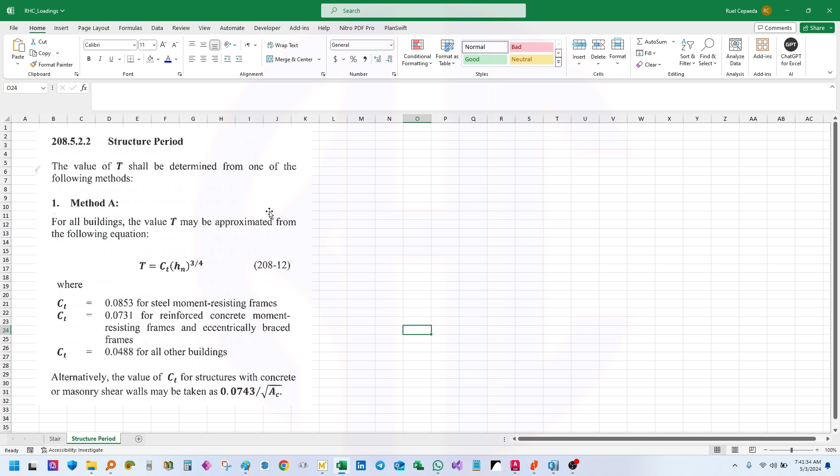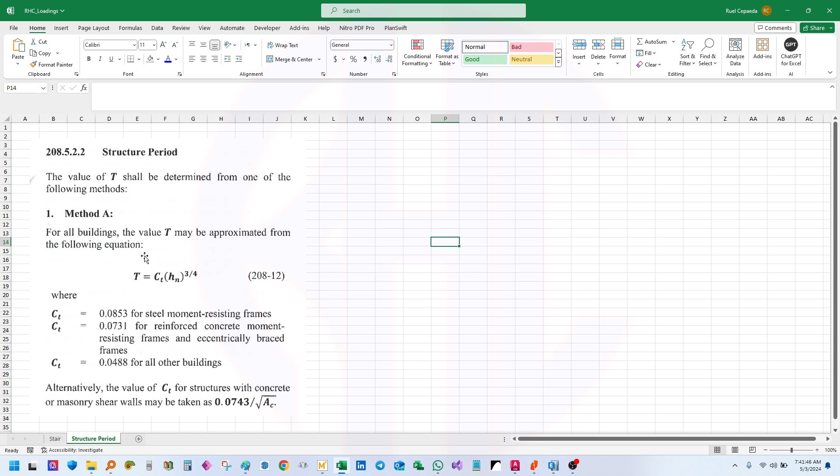Let's go to the NSCP. Our Ct value is in terms of feet, so we need to check the NSCP value. It says here, the structural period as per NSCP, section 208.5.2.2. This is our building period, approximately, using Method A.

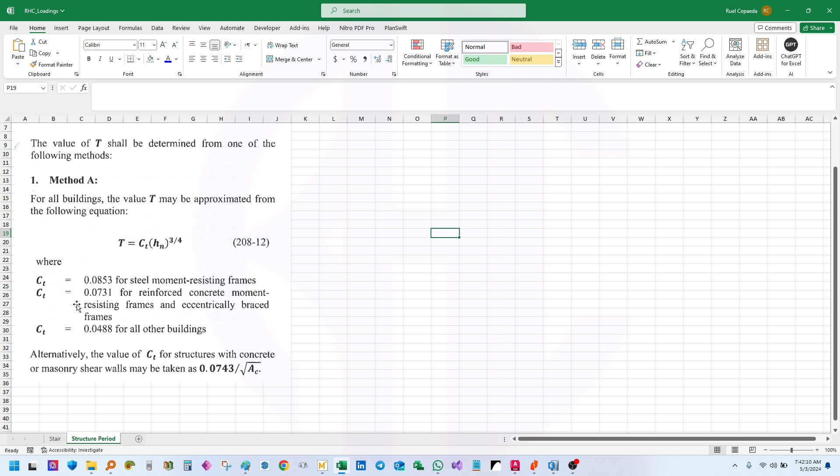But we just need the Ct value, because that's what determines it. However, our NSCP is in metric, so we need to convert it. Since it's reinforced concrete, the Ct value should be 0.0731, but in the NSCP here, it should be in feet.

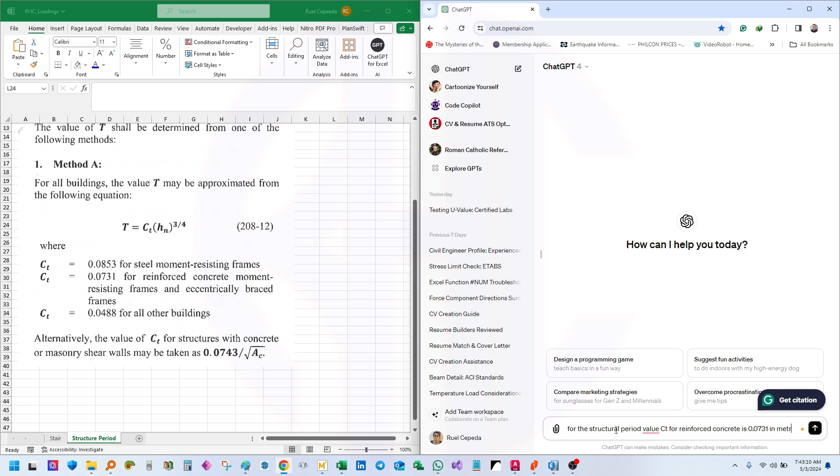So let's ask ChatGPT. For the structural period value Ct for reinforced concrete is 0.0731 in metric. What is the value of Ct in feet?

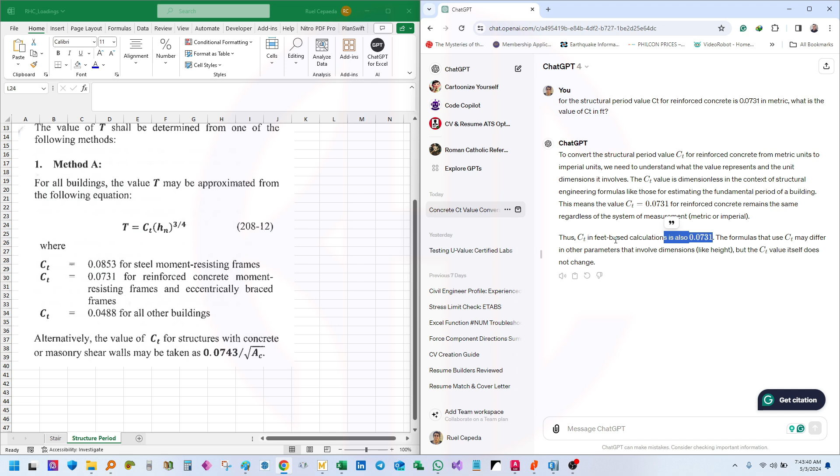Let's copy this. This is in metric. Your answer is not correct.

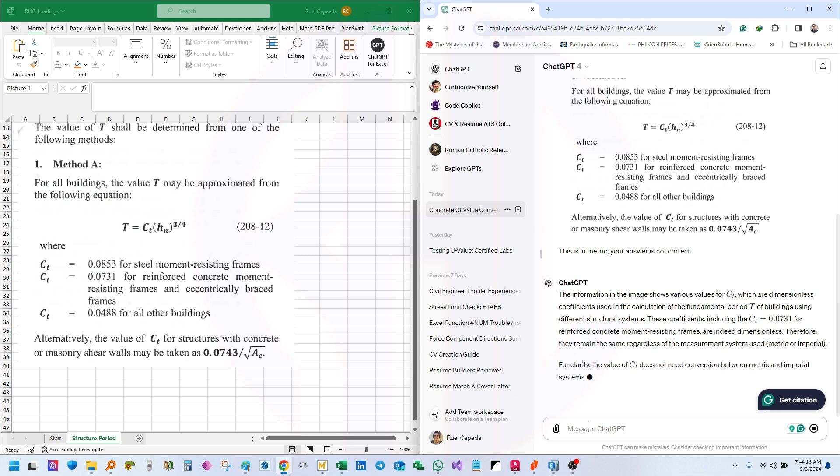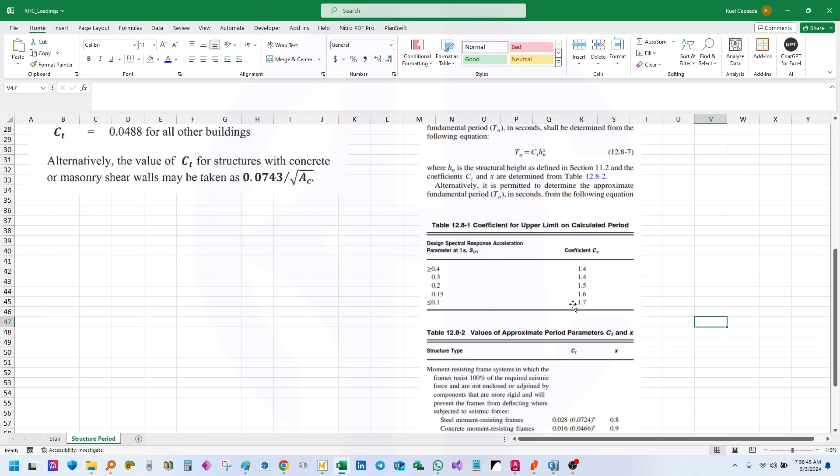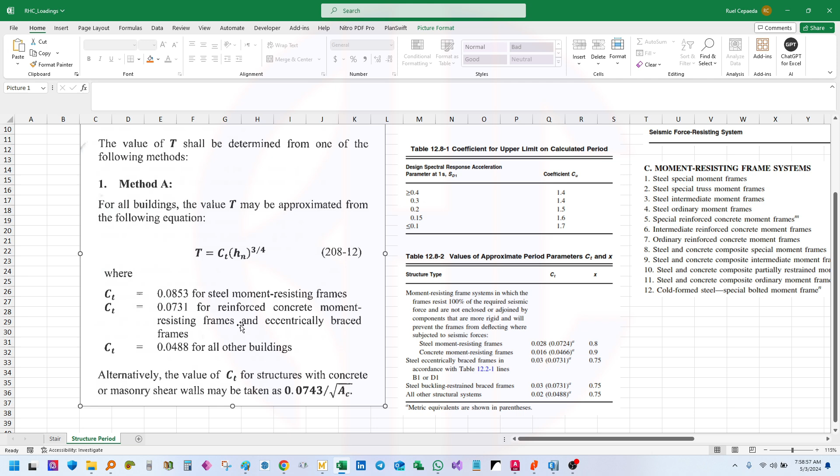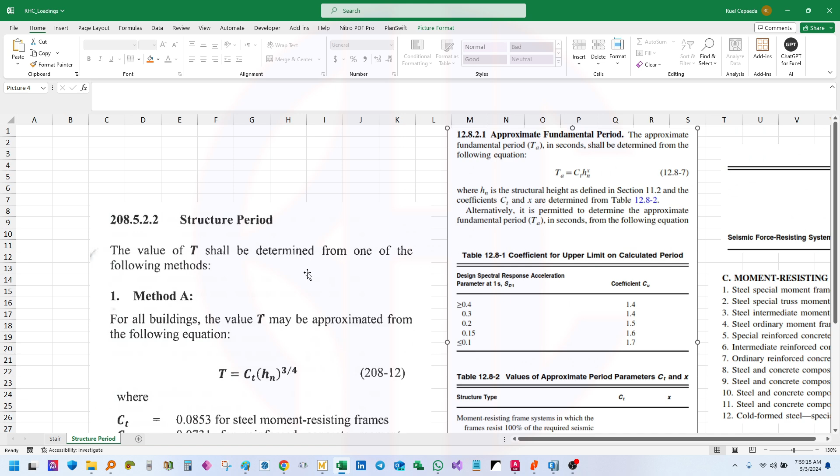Guys, let's check this, there's an update. As per NSCP, our reinforced moment for Ct, reinforced concrete moment resisting frame, is 0.0731. But if we notice here in ASCE, where is that? There it is. The ASCE value for concrete moment resisting frame is 0.016 or 0.0466 for metric, because it says here that A in parenthesis is metric.

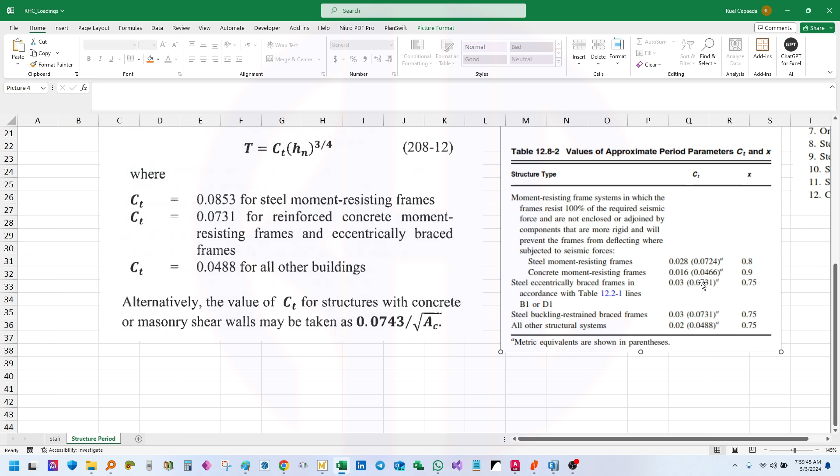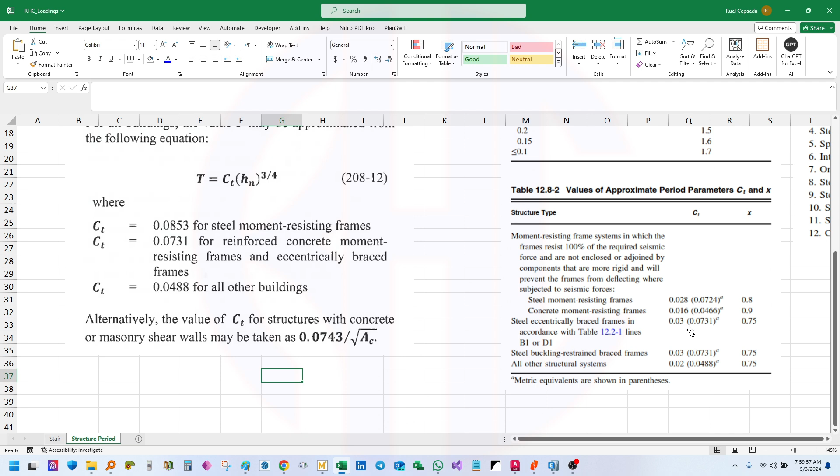But if we notice here, the 0.0731 we have is equivalent for steel, and the equivalent English value is 0.03. See? So of course, NSCP will still govern. So I will use this 0.03. Okay, so from here, that is 0.03.

Okay, then for the bottom story, of course we assume - although for seismic we could analyze from ground to the roof, but to make our design conservative, we will use the bottom story and the foundation.

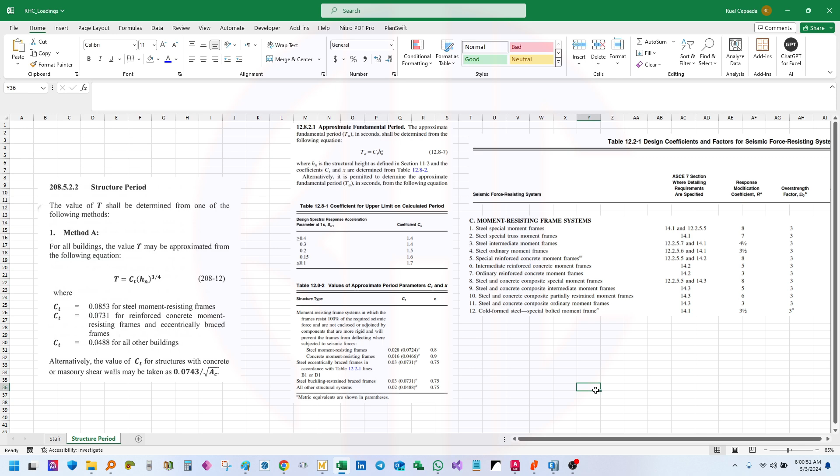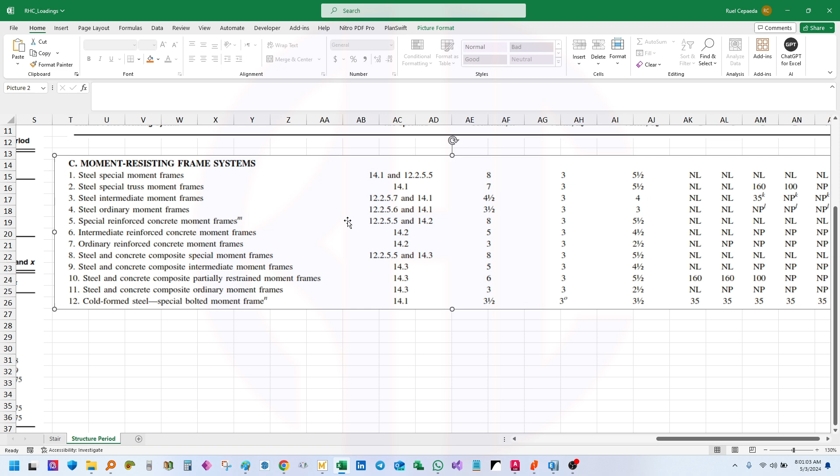Then, our overstrength factor - what is our overstrength factor? 8.5 in NSCP. But if we notice in ASCE 7-10 or 16, for moment resisting frame structures, our R value is only 8. So of course we need to check NSCP since we're following NSCP.

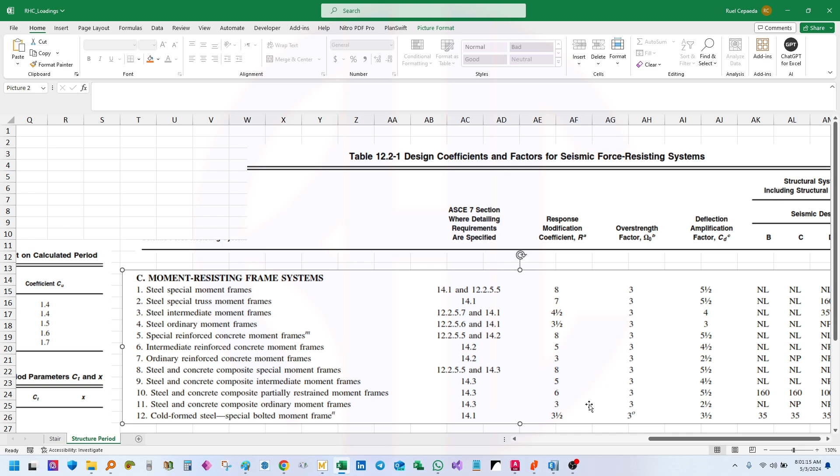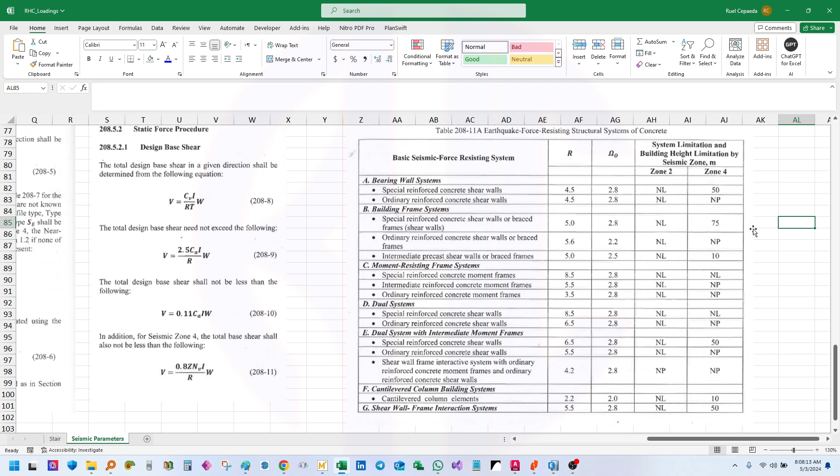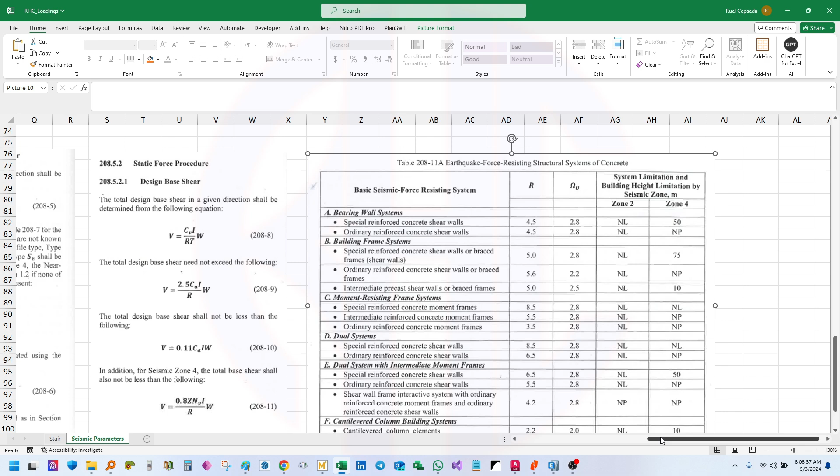But as per table 208-11A, our special reinforced moment frames value is 8.5, then omega is 2.8. Then for zone 2 and zone 4, it's not limited. So if you're in zone 2, without earthquake, that applies to zone 2. It's better since the values are smaller, but mostly we're in zone 4, so we need to use the R value of 8.5. Then the omega is 2.8.

Okay, this is 8.5. Then if you want, you can user-define, say Cv. Okay, let's check our Cv, guys.

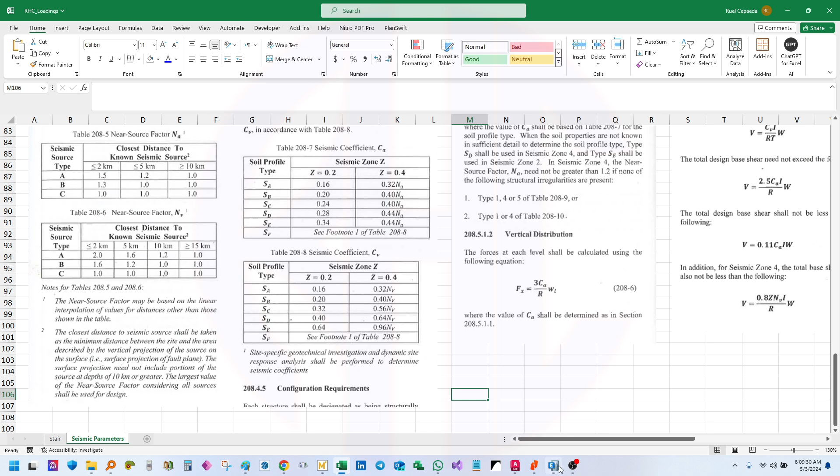So what will we use? Either we user-define, or we can use by distance.

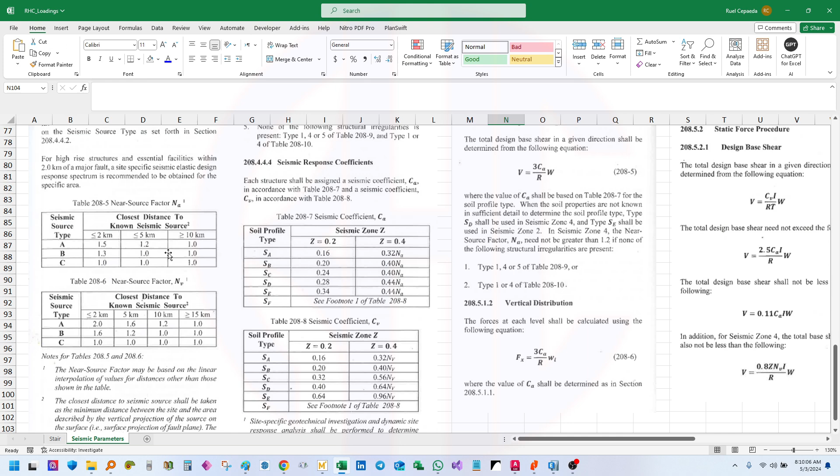There, but if you notice, the updated data is only as of 2018, so it's up to you if you will use it. And it's much better if we have the soil report, so we can optimize our structure.

Let's just click agree. Then from the base map, let's check Google Maps hybrid. Then close. Let's use, we're in Catarman. Catarman location - just drag it, scroll to zoom, just scroll or zoom.

Let's consider this, the Provincial Building of Northern Samar. So once you see the target location, just double click. Double click, then wait for it to load.

There, so it depends on your internet. As you can see, the map data is only up to 2018. So we have a fault here - I screenshot that so we have a reference.

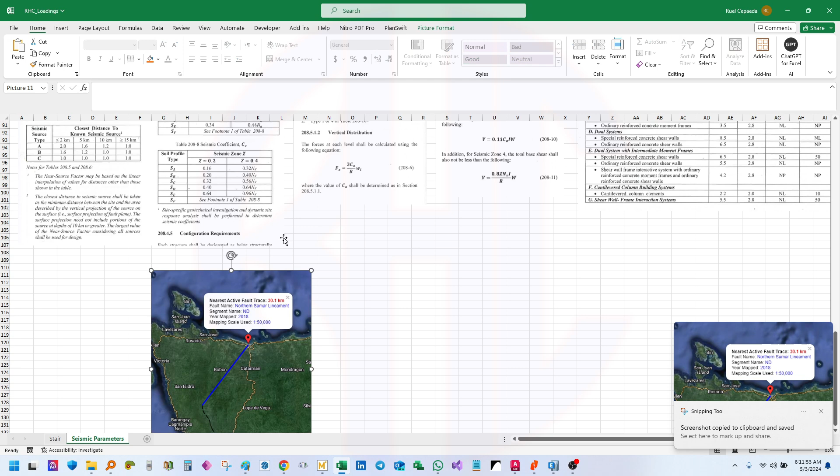So, yung nearest active fault is around 30.1 kilometers. So mula rito, itong gagamitin ko, okay? Ito yung pinakamadali kung makompute mo na yung C.

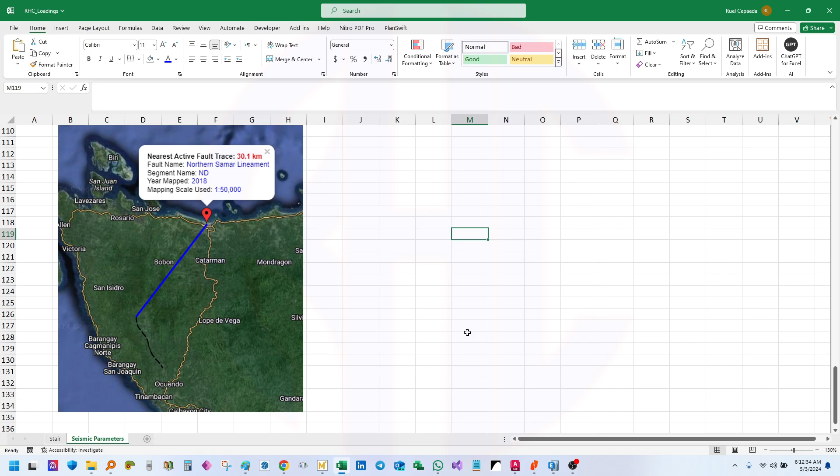CV na lang, pero ito yung natin as per code. Seismic zone factor, 0.4 tayo guys. Nasa seismic 0.4 tayo. Then per code tayo, seismic A. Bakit seismic A? Sa Northern Samar kasi, ito yung value natin, 0.4 siya, if yung value mo ng ito sa SD tayo guys, sa SD. Sa seismic zone 4, 0.44 NA. So paano natin makuha yung NA? Ito yung NA.

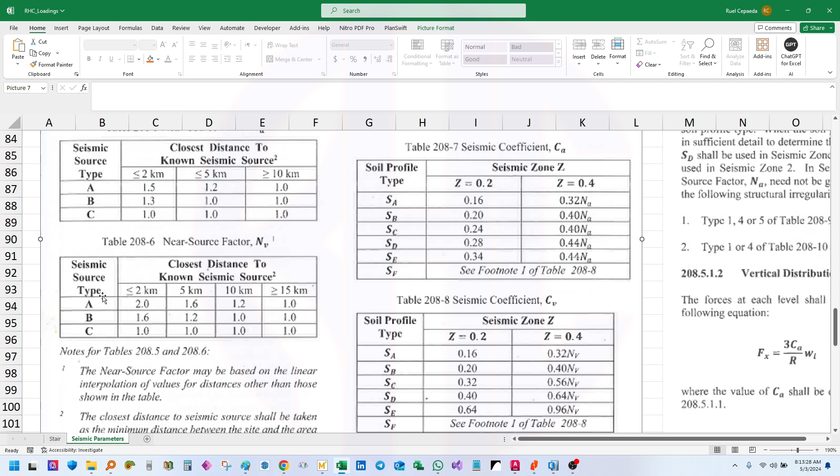If the seismic distance natin from the source for the fault line is greater than 10 kilometers, so 1.0. So ito naman, malayo naman tayo, so 1.0 lang. Then NV natin, same din, greater than 15 kilometers naman tayo. Then mayroon tayong value sa NA and NV.

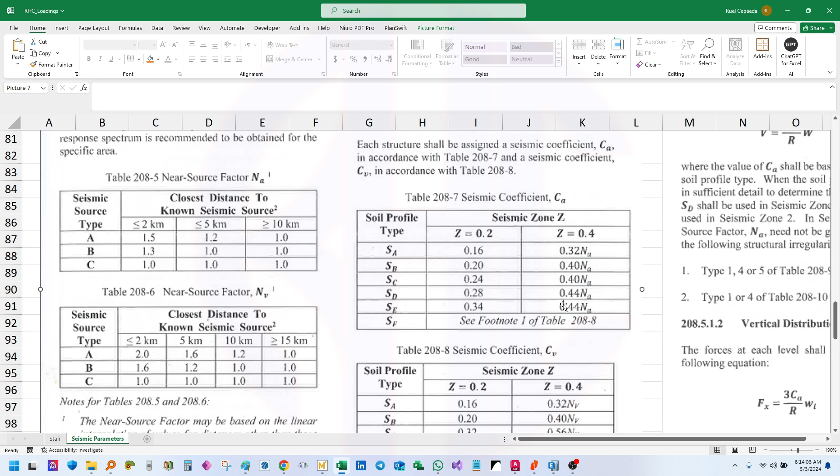So para sa CA, then soil type natin, we consider D, kasi wala tayong soil report. So let's use SD, let's assume it's D. It's SD value, so SD 0.44 tayo NA, para CA. Then sa CV naman, SD is 0.64. I-check natin kung parehas yung value. Ito guys, hindi parehas sa data ni ito. UBC 97 tayo, pero hindi parehas yung value ng CA and CV.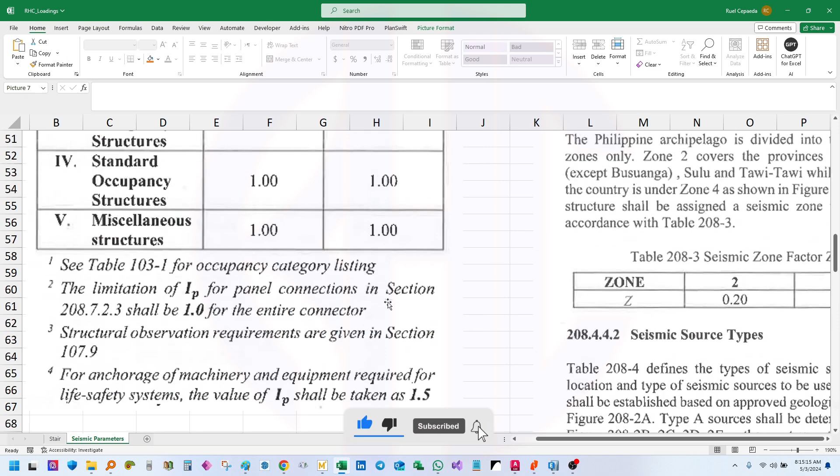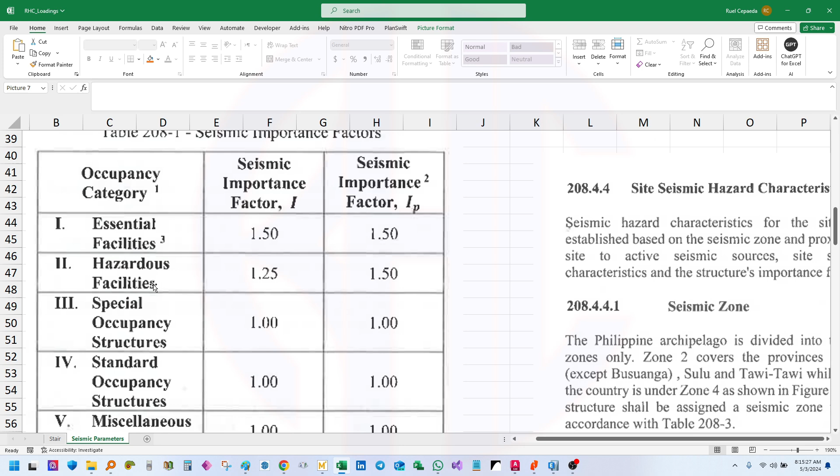Then importance factor. Importance factor, we will go here or refer here, this one. It's per table 208-1. Para sa special occupancy, 1; essential, 1.5; hazardous, 1.25; standard occupancy tayo, 4 tayo, category 4, then miscellaneous 4, 1 din. So therefore, 1 yung importance factor natin, 1.0.

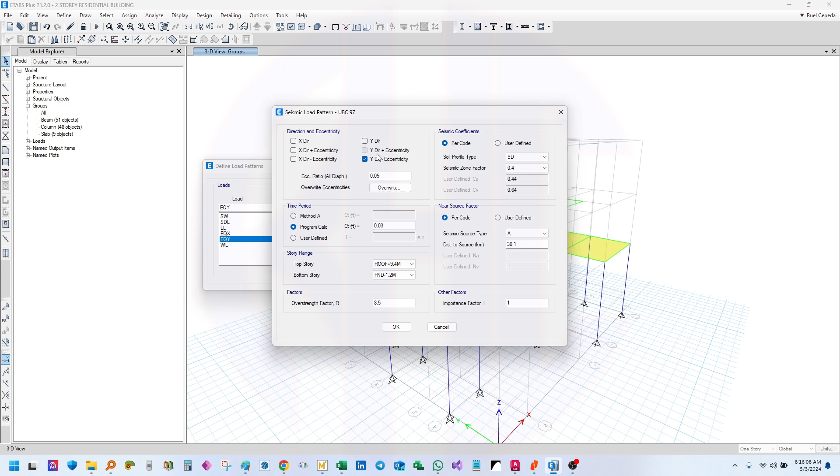Then okay, then punta tayo dito sa wind load. Wind load, it should be yung type natin guys, wind. Ayan, tapos ASCE 7-10, then modify. Then modify na natin. So ngayon, we have two option by the coefficient, exposure coefficient, kung paano natin transfer yung lateral load. It is exposure from extent of diaphragm or exposed from the frame and shell. So ito commonly para sa mga open structure to. So ito yung ginagamit natin.

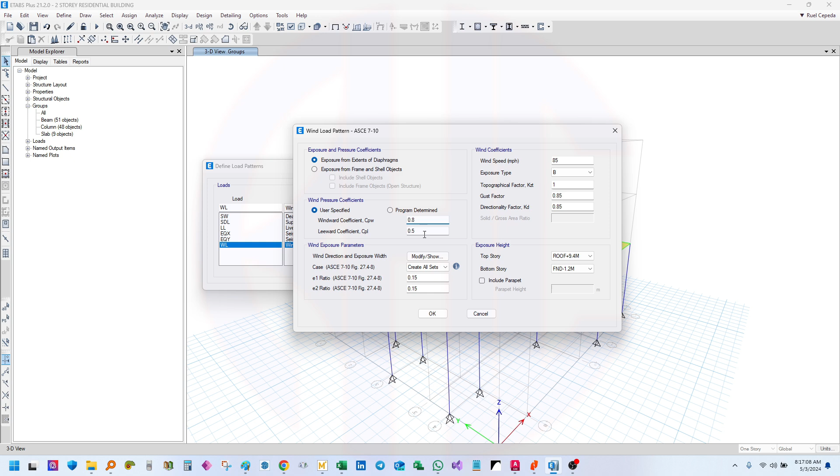Then pwede tayo mag-specify ng windward coefficient and the leeward coefficient. If you want to consider na si program na lang mag-calculate, pwede rin. Pero for this, pwede tayo mag-set ng value, okay? Ng sarili natin. Then anong direction ng coefficient?

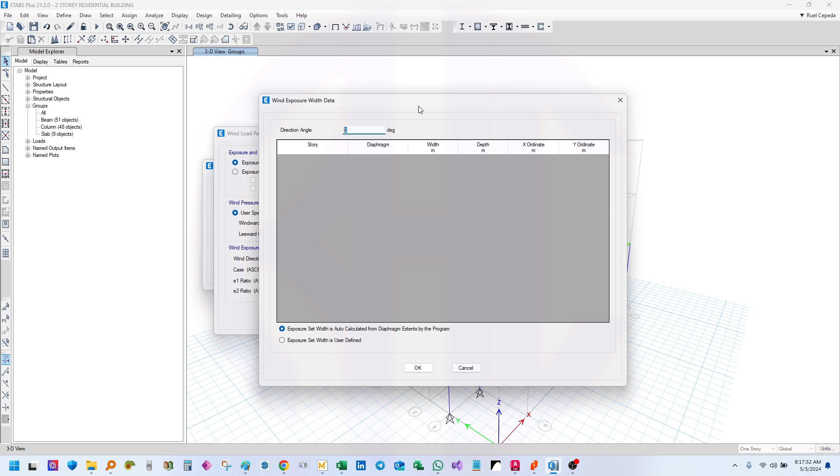So from here, modify ko. Pwede ka dito mag-set itong direction. If you modify two direction in the wind, x and y, so kailan yung isa is 0, then yung isa naman is 90 degrees. So for this, kasi isa lang yung define ko, then i-create ko yung 12 cases. I-0 ko lang siya. Kasi ito yung i-ano niya. Ito, for every case kasi, pwede mo set siya kung anong direction. So ang gagawin ko, create all sets lang. Then ito yung sets niya ng direction na yan. So lahat na ng direction, i-apply niya automatically.

Then punta tayo dito sa speed and then mph. Sa Catarman kasi, kph to mph. So wag kayong mano sa internet, search lang kayo pag hindi alam. Pero kailangan niyo secure palagi yung result and verify. So sa Catarman kasi, pumatak or sa Samar is 320 kph. So medyo malakas yan, so approximately 198 to let's say 199 na lang.

Or sige, 198.84, this is 198.84. Ayan, anong exposure type to? So kung alam mo na yung exposure type nito, pili ka lang diyan. So for this, we will assume B. Also the topographic factor, KZT 1, gust factor 0.85, directionality factor 0.85.

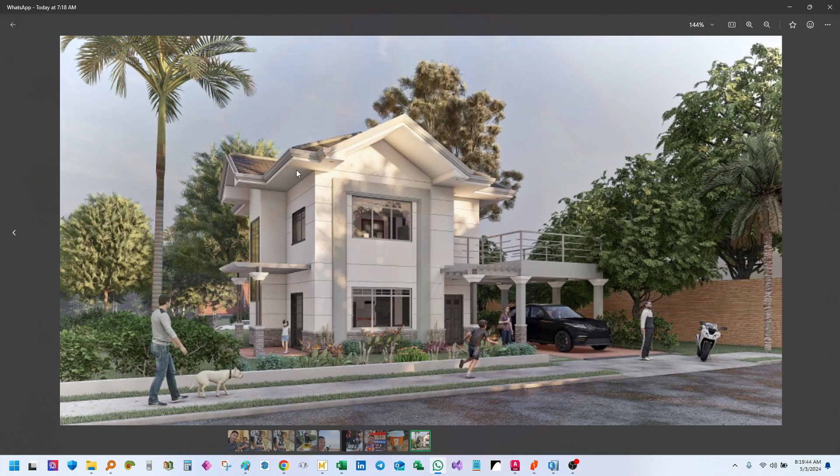So kung sa ano natin wala tayong parapet kasi nga, waterproofing, roofing. Roofing na siya, no? So this is okay, roof. Then okay, wala tayong nakaligtaan. This is dead, superimposed load, live load. Okay, goods na tayo, then okay.